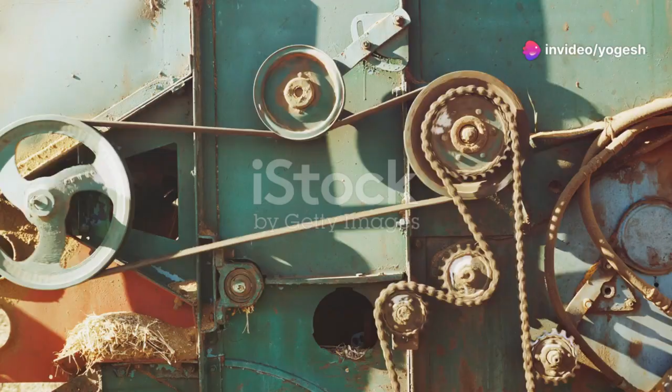What exactly constitutes this magical BOM? Simply put, it's a complete list of every raw material, component and sub-assembly needed to create a product. Think of it like a cake recipe, but instead of flour and sugar, we have gears, screws and metal sheets. Each item in the BOM is meticulously detailed.

We're talking name, description, quantity, material, size, even the supplier. This granular detail is crucial. Imagine you need 1000 specialized screws, but midway through production you realize the thread type was never written in the BOM. Disaster. The BOM prevents such costly mistakes. It's like a detective's evidence board, connecting every piece of the puzzle, ensuring a smooth and successful assembly.

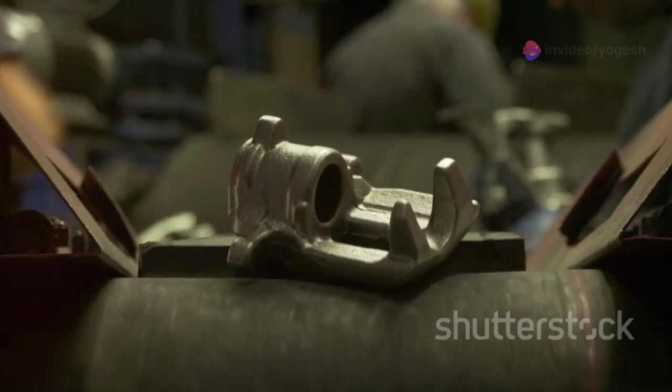Now, let's talk structure. A well-organized BOM is not a haphazard shopping list. It's hierarchical, reflecting the product's assembly. At the top we have the finished product, let's say a sleek new smartphone.

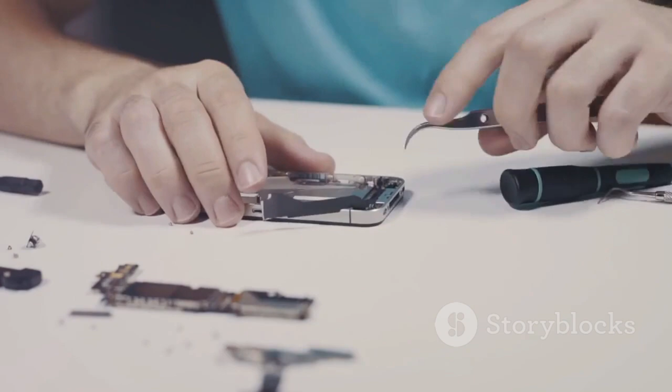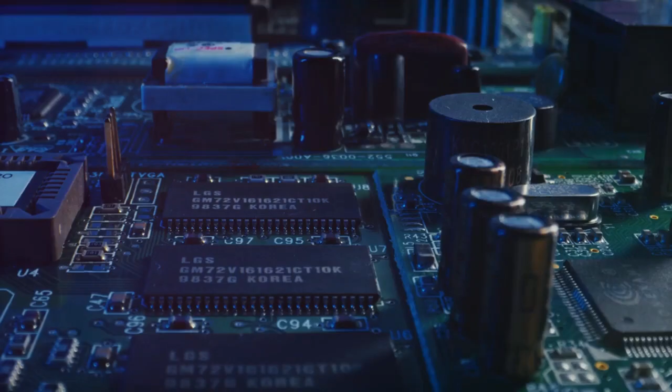Then the BOM branches out into major assemblies. The screen, the motherboard, the battery, each with its own sub-assembly list. The motherboard, for example, further breaks down into its individual components. The processor, the memory chips, the capacitors, and so on. This hierarchical structure provides a clear, logical view of the product's anatomy.

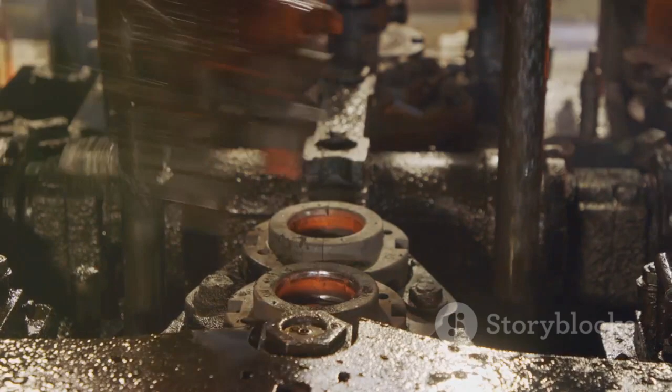Think of it like a family tree. The finished product is the grand patriarch, with each generation representing a level of assembly. This organization is crucial for production planning, inventory management, and even repair and maintenance.

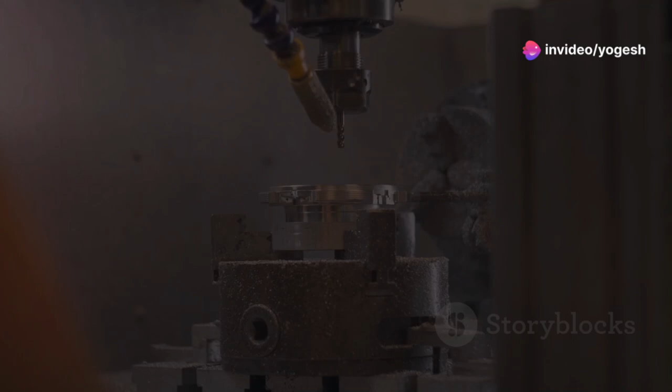Section 4. Precision in Engineering. BOM and Accuracy. In engineering, precision is extremely important. A single wrong digit in measurement can lead to disaster. Here, the BOM shines like a beacon of accuracy.

With its detailed list of components and specifications, the BOM ensures that every part fits perfectly. No more forcing square pegs into round holes. This accuracy translates to higher product quality, reduced assembly time, and fewer errors.

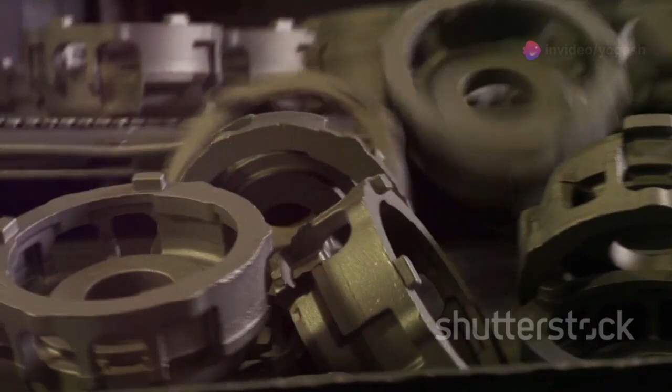Besides this, the BOM facilitates communication between design and manufacturing teams. Everyone is on the same page, working from the same master document, minimizing misinterpretations and costly rework. Remember, in engineering, time is money and accuracy is king. The BOM reigns supreme in both domains.

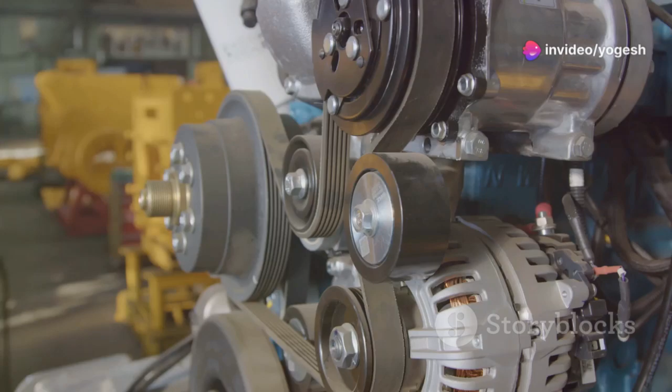Cost control and efficiency, the BOM's impact. Let's talk rupees and paise. The BOM is a powerful tool for cost control and efficiency. It allows manufacturers to procure materials cost effectively. Bulk discounts, alternative suppliers, all become clear. The BOM helps optimize inventory management, minimize waste, reduce storage costs, and prevent delays.

The BOM's impact extends beyond the factory floor. It aids in generating accurate quotes and streamlines procurement. Truly, the BOM is the unsung hero of efficient manufacturing.

Section 6. Conclusion. BOM, an indispensable tool. As we've seen, the bill of materials is far more than just a list. It's the backbone of modern manufacturing, ensuring accuracy, efficiency, and cost effectiveness. From the smallest screw to the most complex assembly, the BOM brings order to chaos, transforming engineering dreams into tangible realities.

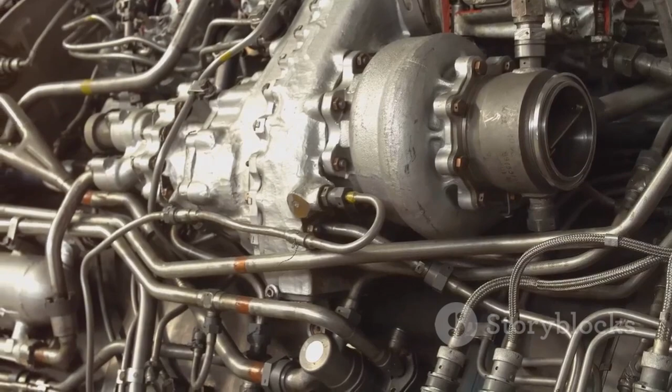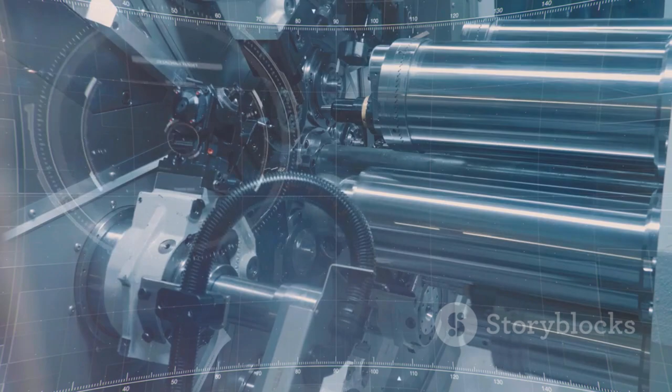So whether you're a seasoned engineer or a curious mind, remember the BOM. It's a testament to the power of meticulous planning and the foundation upon which countless innovations are built. Until next time, keep questioning, keep exploring, and keep playing Kaun Banega Crorepati.